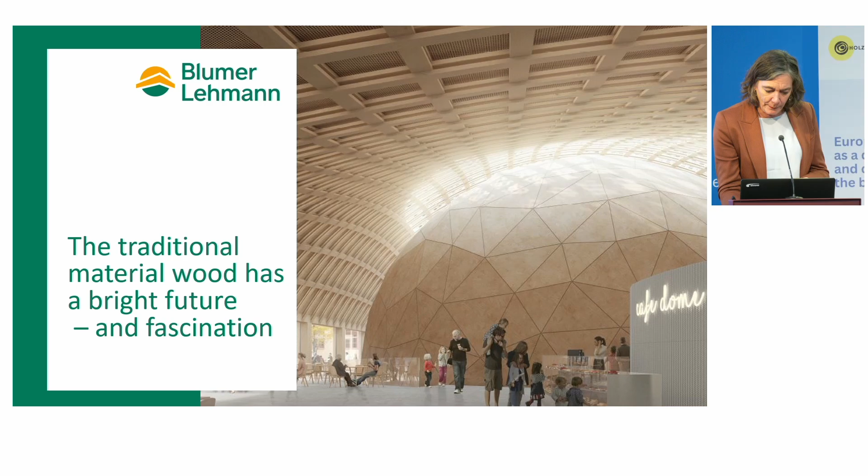550 people are working since 149 years in Gossau on the topic of how to bring that material, which is growing next door, into constructions, but also doing the sawing of the material.

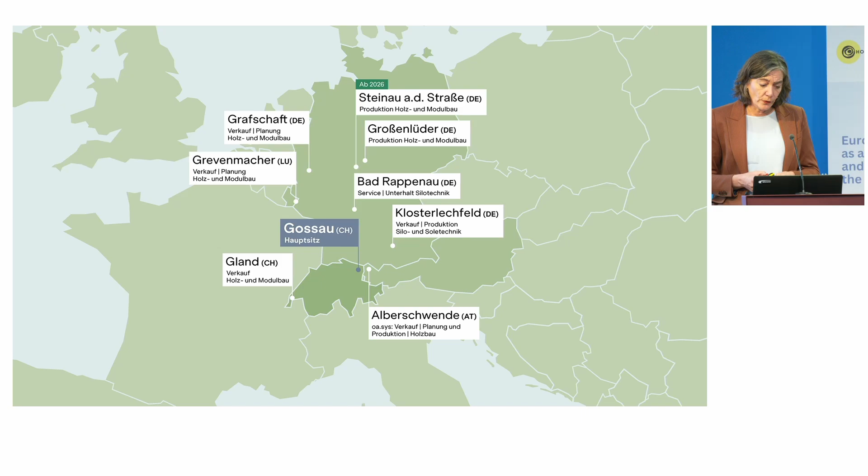We are not only working in Gossau, we are also having subsidiaries in Germany, Luxembourg and Austria, as Uwe Kies mentioned, because we want to bring technology also into other markets and other opportunities. What we do is work in the whole wood life cycle. That's what we did for the last 140 years, and that's what fascinates us. We bring in the logs, and at the end we are transporting the rest material out, or transforming it to energy or to 40,000 tons of pellets, because that's the sustainable use of the resource, even if it's not long-lasting.

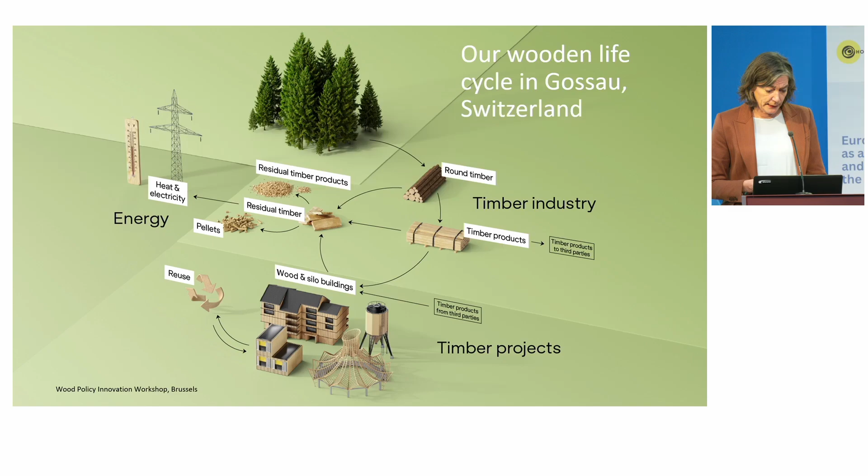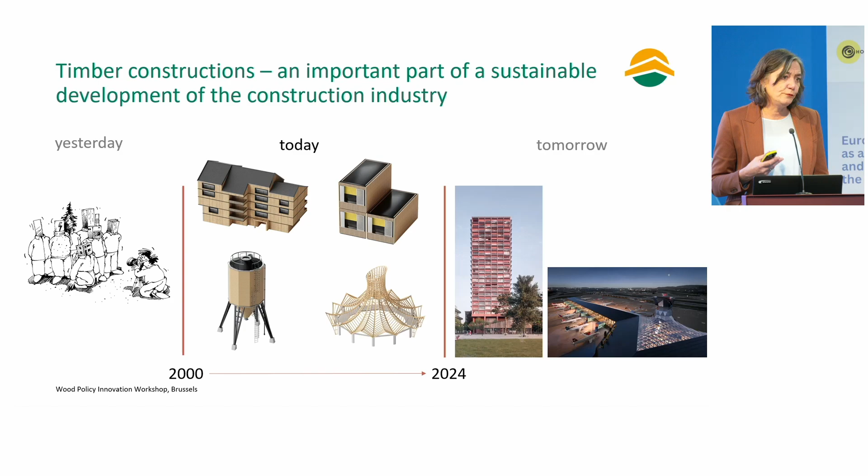I'm coming back to it. Construction industry for the last decades - when we look back, we had this traditional form of wooden houses or farmhouses. Then about 2000, we started to do wooden buildings or wooden single-family homes, which was at this stage very innovative because nobody could imagine living in a wooden house. During the last 20 years, the projects grew bigger, more innovative, and today we are faced with a decade where we have to find the technology to come back to the cities, also to build higher and to build larger.

What it needed for this distance, which we did, was not only the topics I'm talking about at the end of the presentation, but also the topic that building with wood is not only sustainable in an ecological way, it's also a great contribution to climate-friendly construction. The serial and modular constructions also contributed a big amount to a more sustainable world.

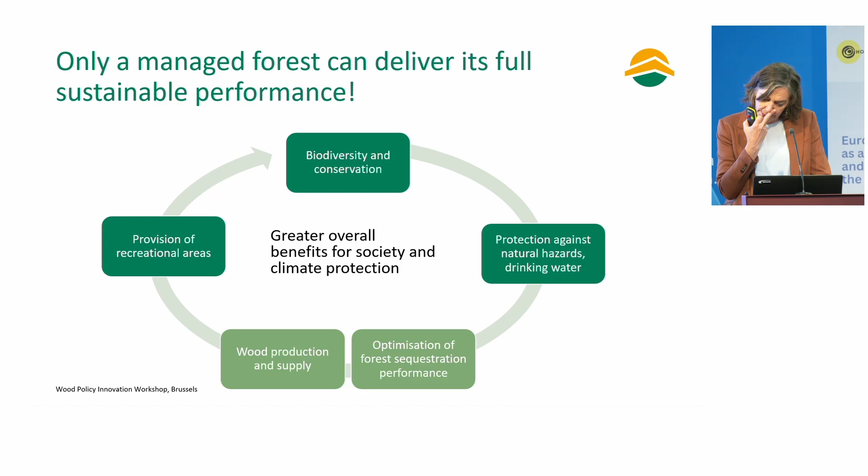Wood products as a lever to decarbonize the built environment also ground on a wood-based value chain. Uwe Kies has mentioned the various functions of the forests, but I only want to emphasize the two highlighted green buttons: the cruciality of the wood supply or wood production for the whole value chain, but also the effect which these activities have on the climate through the sequestration performance of the forest.

I say that very clearly for everybody who has the vision that not using the timber in the forest is the best thing to do for climate: this is like a full vacuum cleaner bag which stays in the forest and doesn't do anything in 50 years. So this is not a concept for the future.

Please take home that the older the trees get, the less sequestration action they have, and it's really crucial that you think about using the forest, optimizing it in terms of fitness for reacting to climate change, and producing long-life wood forest products for construction and industry, because this is the storage for the future. It also substitutes a lot of material, including fossil-intensive materials, and at the end of the day we will all be able to do climate-positive buildings. That's the substitution effect of wood.

If you see that concrete is using almost exactly the amount of carbon that India does as a whole economy.

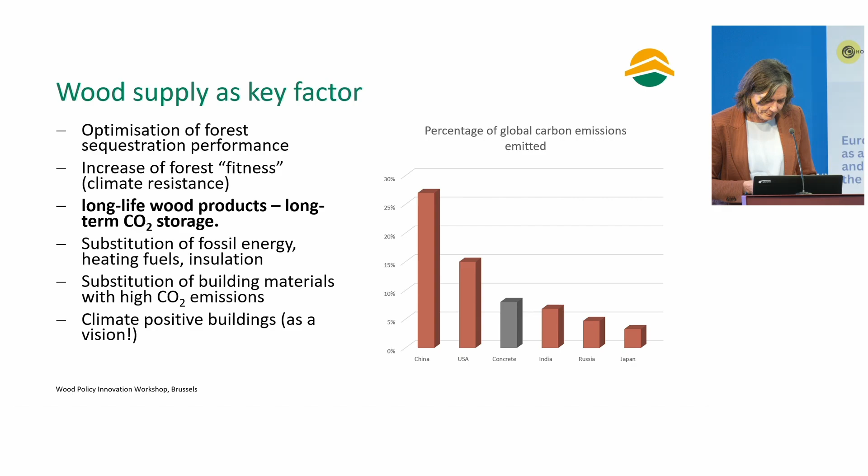Let me say another topic. We all talk about circular economy, and the first action to optimize the circle of forest and wood-based industry is to extend the storage factor. The more we use wood, the more we store, and the more we contribute to a higher storage of long-life stored carbon. Prolonging it means reusing it, but the effect is much lower than extending the storage right from the beginning - and now, because now action is needed.

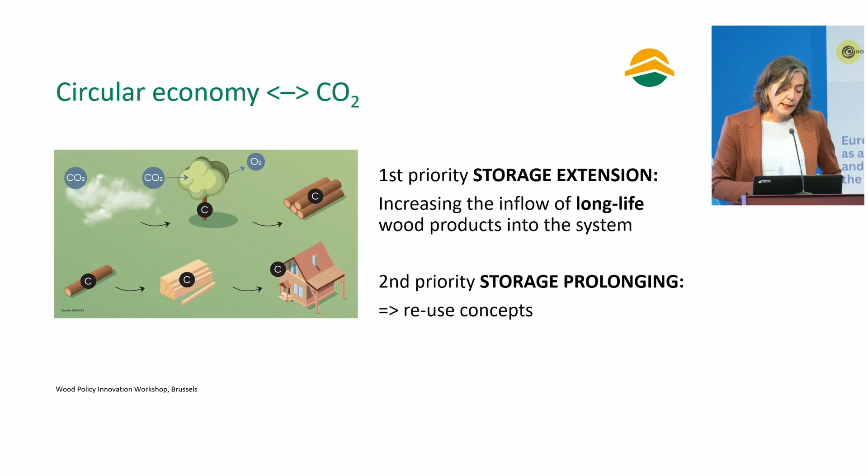Timber industry plays a crucial role in that transformation, producing semi-finished products, mainly using fir and spruce, because this is needed for construction industry - today all the normation is based on that species.

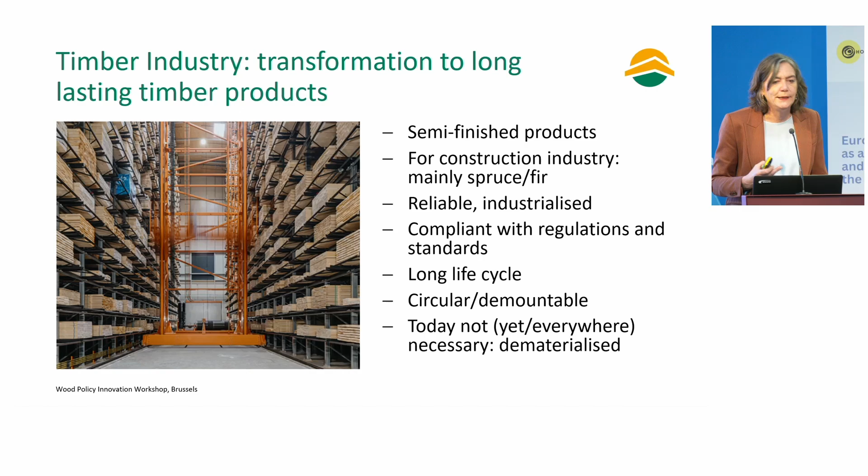So please consider that also if you think CLT is not the material to use because it needs too much wood at the moment - that's fine, because the more carbon we store, the better.

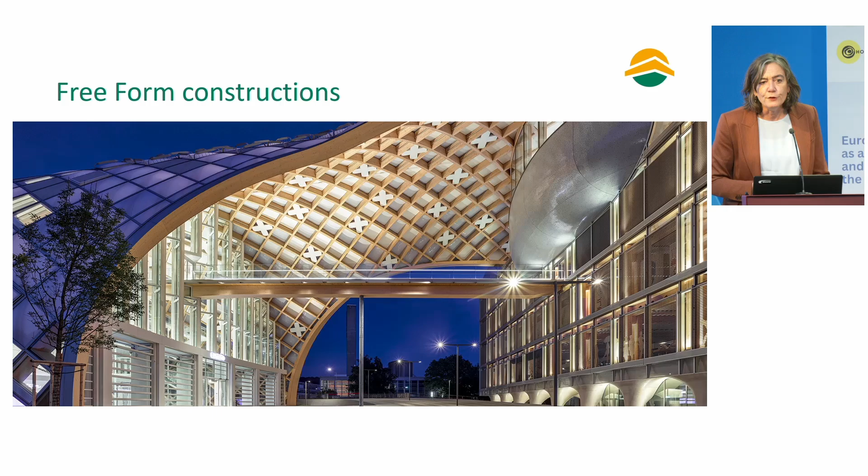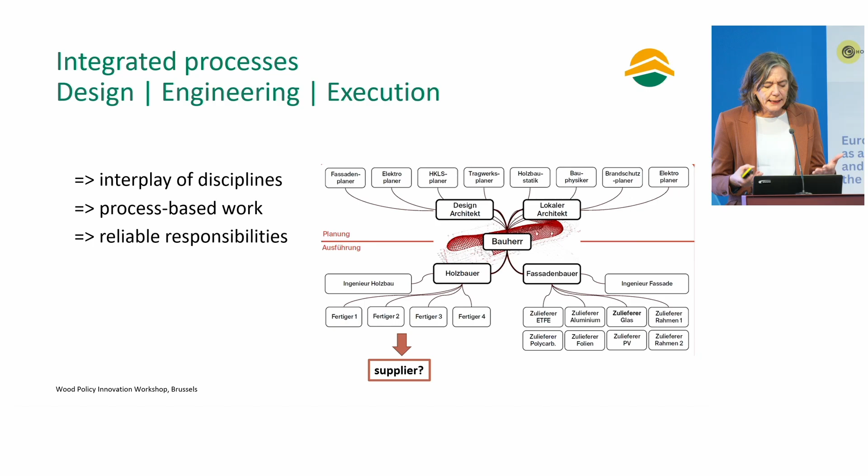Let's have a look at the timber constructions, from freeforms to standard. Freeform constructions are model-based planned constructions, like you see here - an interplay of disciplines, process-based, IT-based, and in the end you get the information that you can produce.

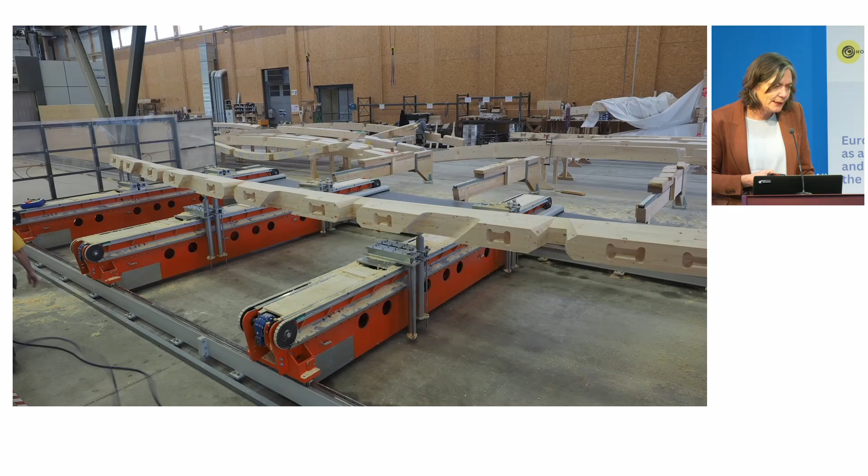These beams, as you see here on these pictures - in this project it was about 4,600 pieces - you bring them together to constructions like this, and at this moment this building looked the best, because today there is a skin on it and it doesn't look that nice.

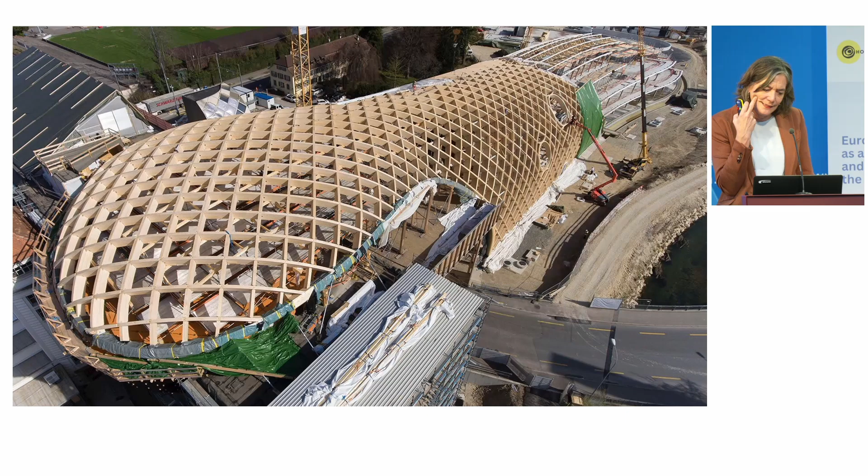You could think, is it really necessary to build in Saudi Arabia, or is it really necessary to do it in wood? Yes, because the substitution of concrete is a topic there too, and if the European industry can bring these products there, it's more sustainable than leaving it to the conventional construction industry.

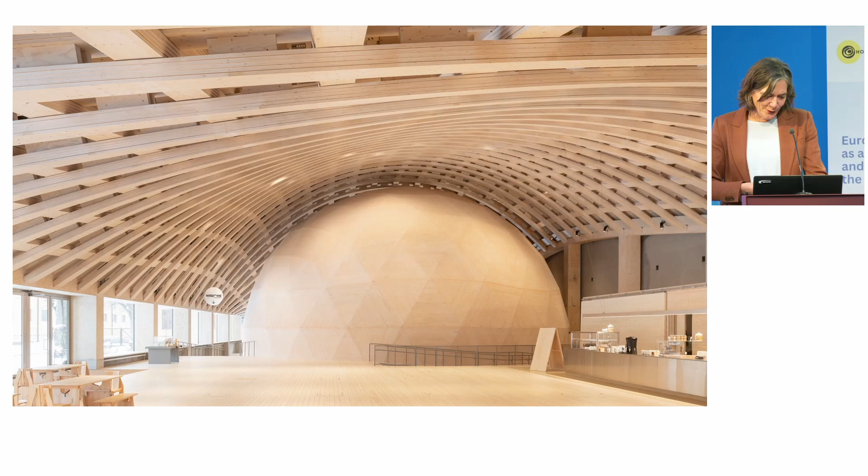At the end, I warmly invite you to go and see how it feels to live in those kind of buildings. Another example is Wisdome Stockholm.

A beautiful example we did with our Scandinavian partners using LVL. It's an example of how you do innovation with existing products and bring them into construction.

And a mosque in Cambridge, a beautiful example of picking up historical architecture and innovating it into really beautiful buildings, which is open to the public.

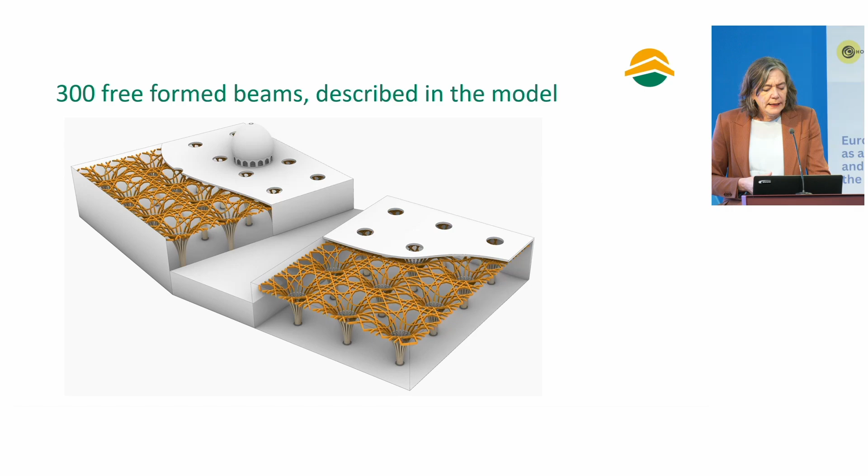It was modeled in a parametric design, as you see in this picture. It was brought down to 300 beams, which were produced in Switzerland and then brought to Cambridge.

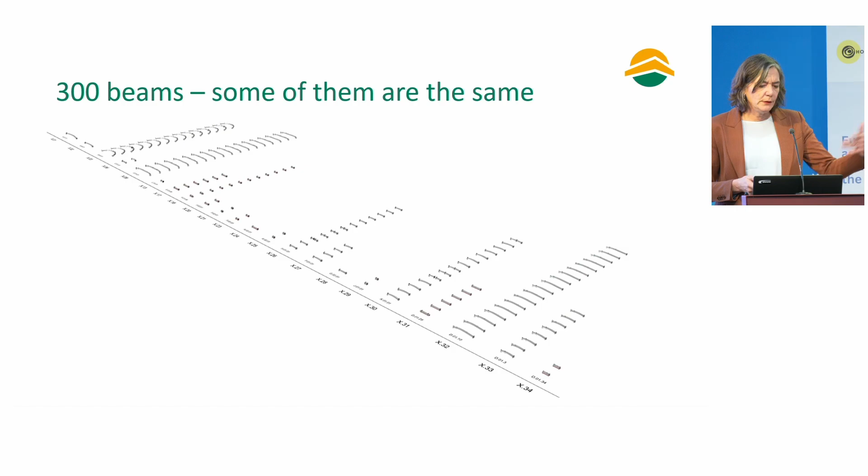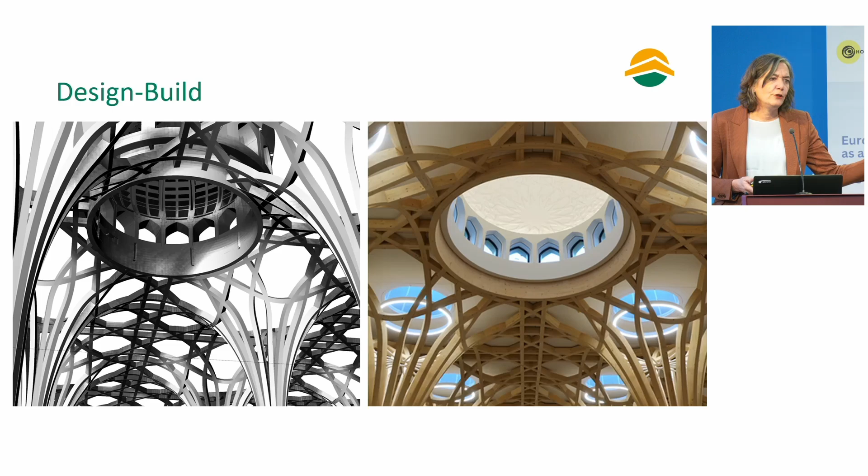This is design build. You've got an idea, you develop the model, and you produce the beams, and in the end it looks like this. This was one end of the sausage, or maybe timber beam.

The other end is a standardized, prefabricated, or modular building.

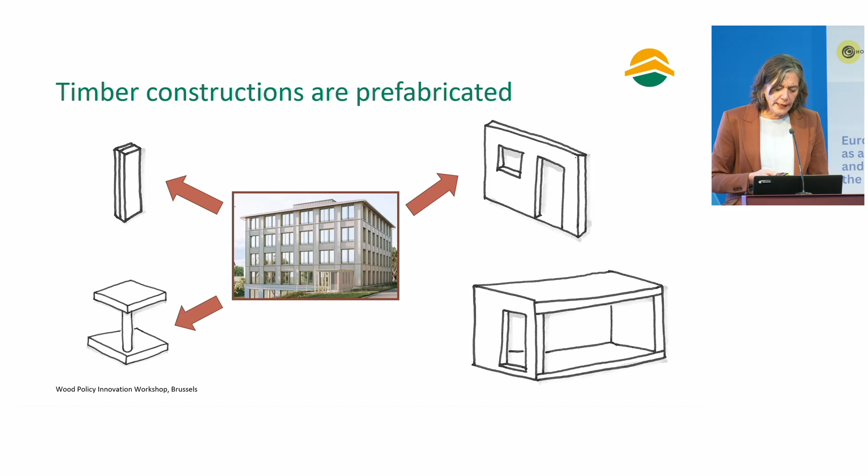You can bring constructions to the construction site as beams or in separate parts, but you can also do prefabrication in your facilities in the form of elements and modular buildings. Elements can be used for conversions and extensions in dense cities.

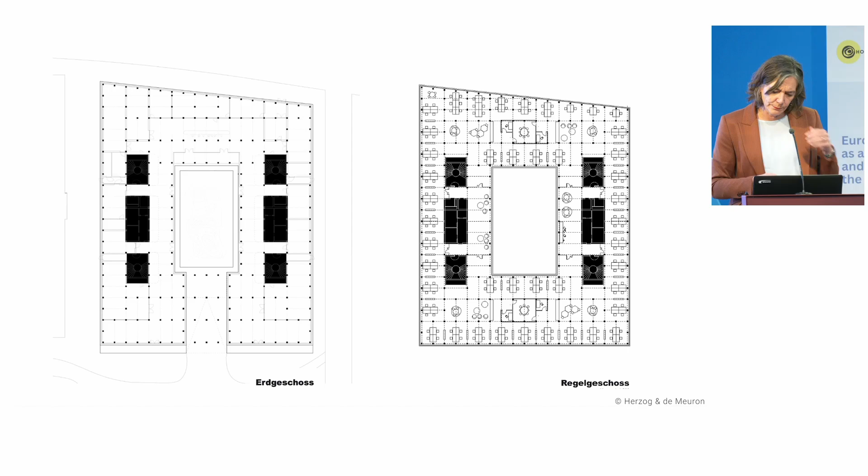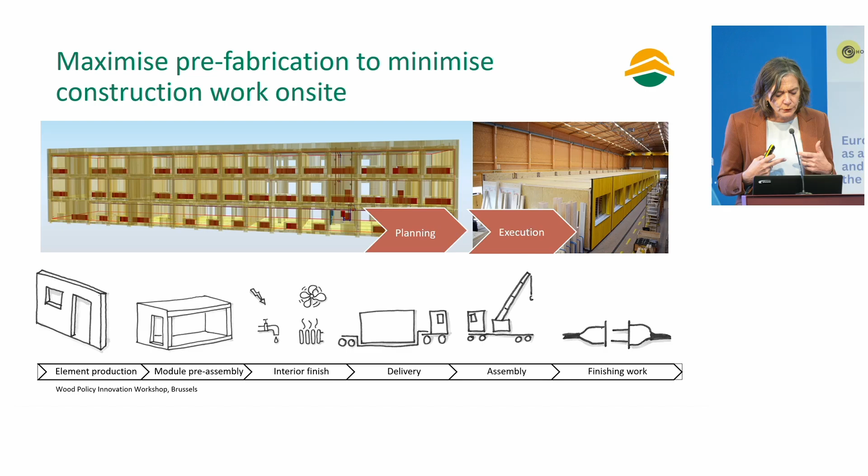Modular building goes one step further, because you take all your subcontractors into your company, and you maximize the prefabrication to the max.

We often do modular buildings in school buildings because they're easy to order. They're built in a very short time.

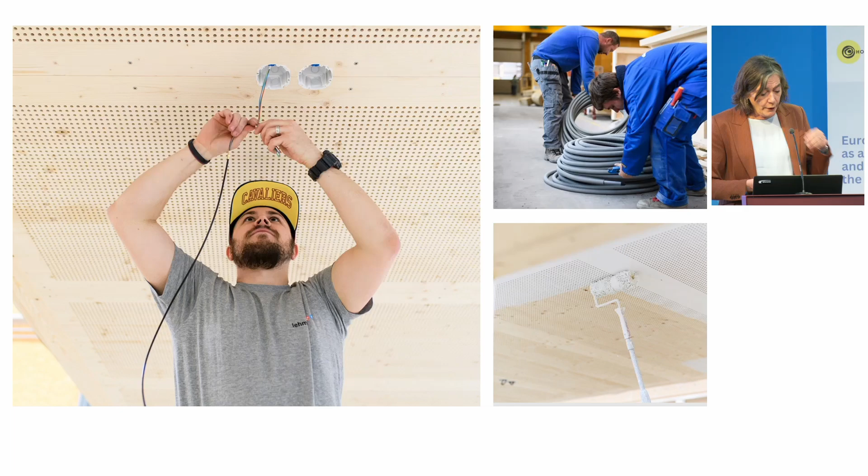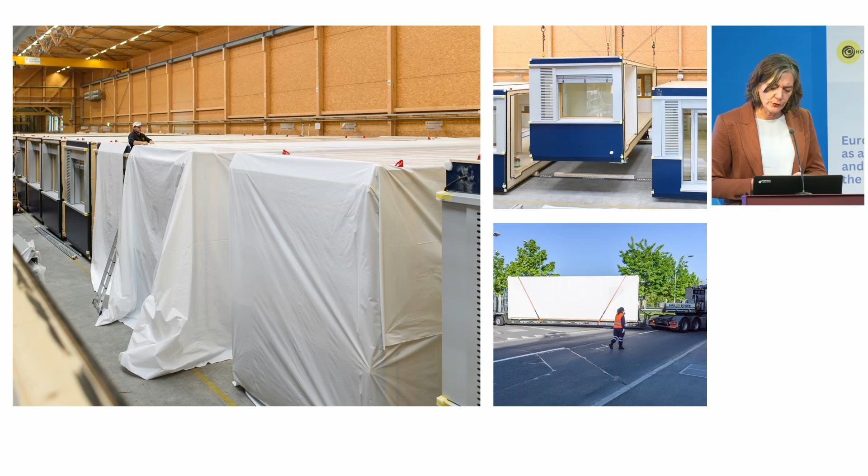Produced off-site in our factory, everybody comes to the factory and brings their skills in. They are protected during storage and transportation, and then built on the construction site in a very short time.

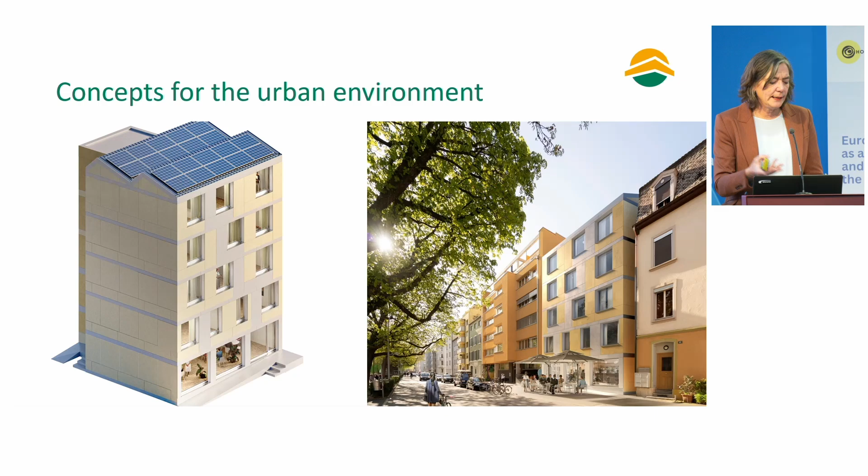Also combinations of modular buildings and elements, like here with the example in Dresden, or gym halls, which can also be standardized, as an idea of a concept for the urban environment.

Yesterday, we almost only did school buildings, because this was the most attractive market, also because these buildings were moved during summertime when they were needed on another site.

Today, this is a much wider market with different applications, often permanent, with the aim of minimizing construction work on site. The most interesting topic is reuse.

Because you don't have to disassemble these kinds of constructions, it's more economic than only doing it in parts. And the question is, can you scale that? Can you also do this form of construction for more cost-effective building, to help solve the living costs?

It will be possible, but only with standardization. Standardization is the key word, and that's the beginning of a more efficient building industry, where timber can play a crucial role.

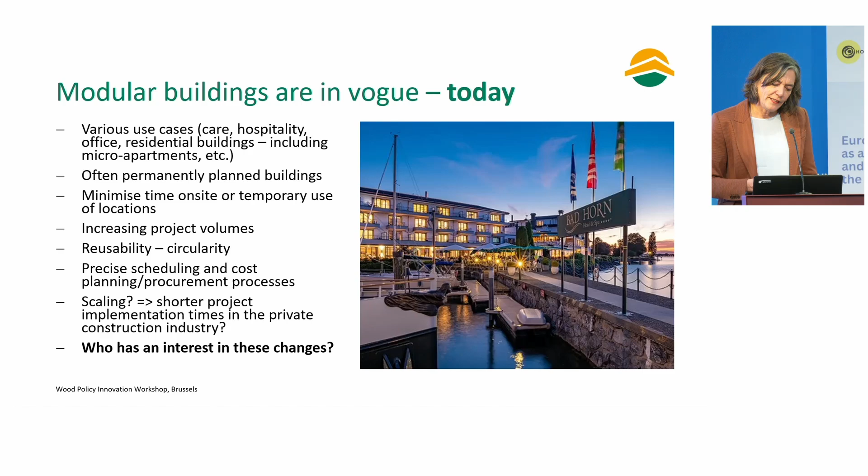The question you have to ask yourself is, who has an interest in these changes? For sure not the builders, the developers of the building industry, for sure not the general contractors. So try to bring together the offer of this kind of building with the demand for it, and then you will be more cost-effective than today.

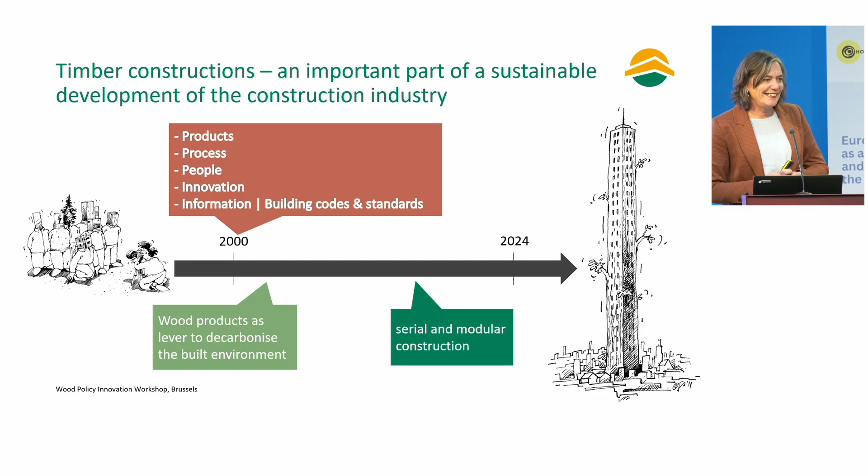So I close with the red square here. Uwe Kies has already said it: what we need for the future are products, process, and people, meaning sustainable and long-lasting products.

And of course also process, meaning efficient and optimized processes in planning and production, too. And we need qualified and motivated people, which means advanced, modern and interdisciplinary education across borders.

That's the three crucial things to be more successful in the construction industry tomorrow, also in contribution to climate change. There is also responsibility and attention needed for wood-friendly standards, codes and norms, and please, harmonized norms and regulations.

That's also part of the more effective work for all the engineers and builders or timber construction companies in Europe. We need innovation, R&D, and also pilots to demonstrate what we can do.

We need an integrated value chain, an exchange of these topics, and an integrated approach of long life cycle products and timber products within the chain. And we need more collaboration, trust and partnership across sectors and within sectors as well.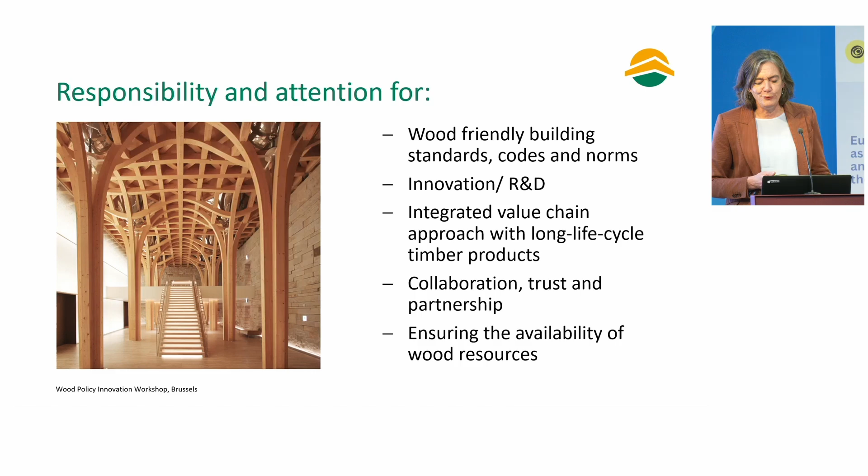And again, we need to ensure the availability of the wood resources we need for our companies, so we can become 150 years old through all these challenges.

Thank you very much. I strongly believe wood has a bright future, and if we use it wisely, it will be a great contribution to climate neutral constructions, but there will be a lot to do along this way. Thank you very much.